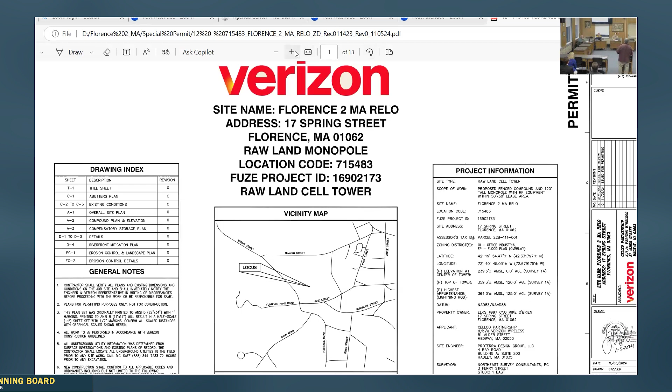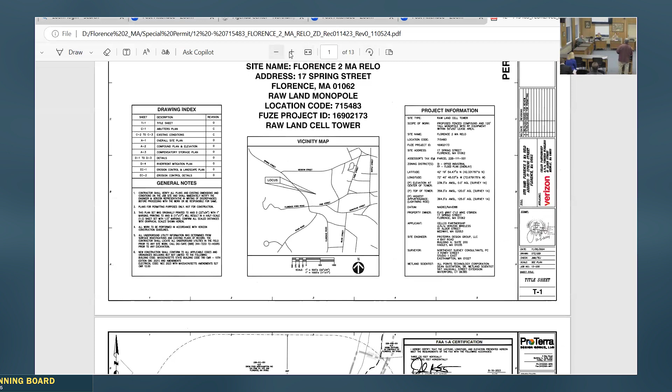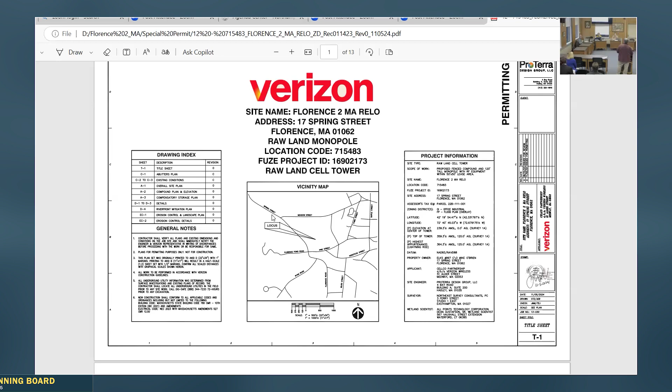Hi, my name is Jesse Marino. I'm with Proterra Design Group, civil engineer on the project. As was stated by Ellen, this site is a replacement for the smokestack site located adjacent. It's located on a property here about 3 acres in size. It's the current home of the Elks Club.

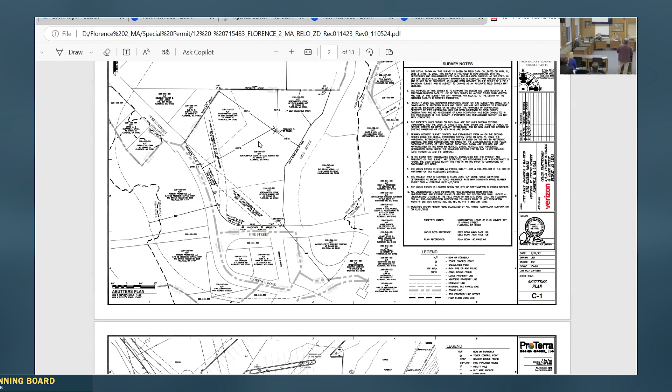So this is the existing property. The adjacent river is on this side to the east. We've got a co-op farm to the north, and two streets located - Spring Street is located to the west. Here's the existing site. There's an existing building for the Elks, there's parking in the front, and we're utilizing an area to the right of the building in this location to propose the facility.

So if we zoom into the site, again, adjacent here is that existing building. We're proposing adjacent to the building to install an area that consists of a monopole with elevated platforms. The reason for this is it's located in the floodplain, so we need to elevate those things above.

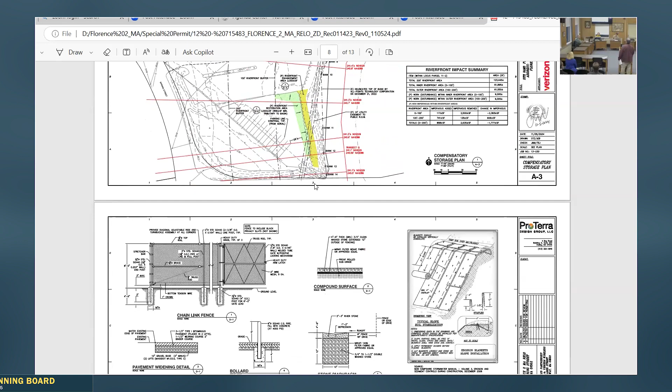Around the site, for security purposes, we're proposing a chain link fence with slats. The reason for that is the slats give us a bit of an opaque look, so you can't see through, but it also allows the water to come in and out in the event there was a 100-year flood event, so it doesn't impact any of the floodplain heights.

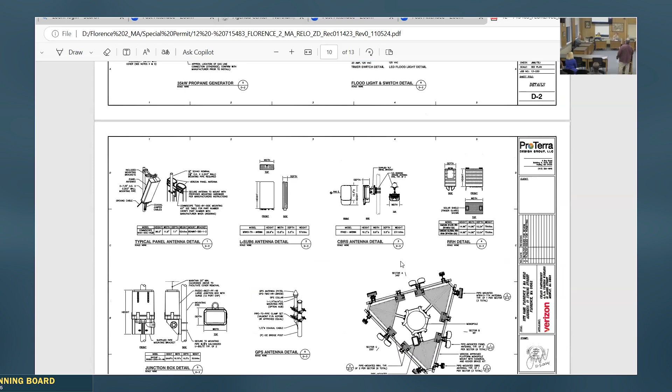The equipment itself is very similar to what's on the stack now, except that it's the latest generation of equipment. In order to have this upgrade using the latest and greatest equipment, the stack was not able to support that any longer.

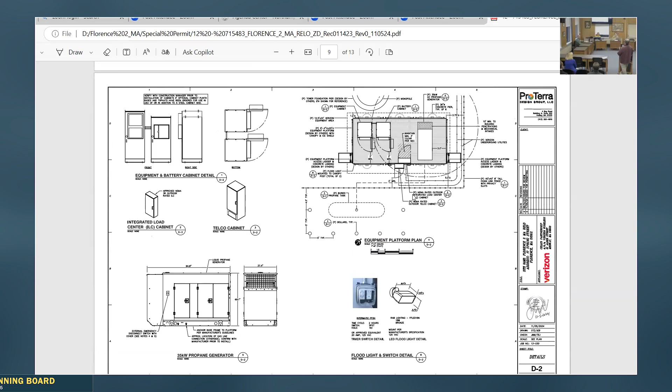So this new site will allow that to move forward. It does have a generator, just basically a small backup generator, fed by propane, so there isn't fuel storage there as far as diesel or anything like that. The idea is that if there was a power outage for an extended period of time, this can be used to charge the batteries and keep the equipment running.

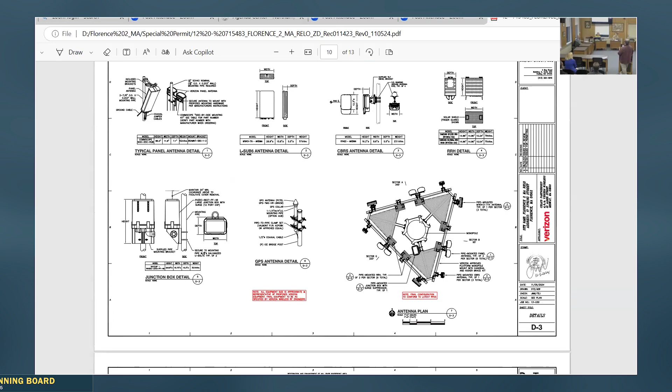At the level of the antennas, it's basically a typical platform, as we'd call it in the industry, and this allows the different antennas to be installed on it at the height required by the radio frequency folks, so that we get similar or better coverage than what's on the site now.

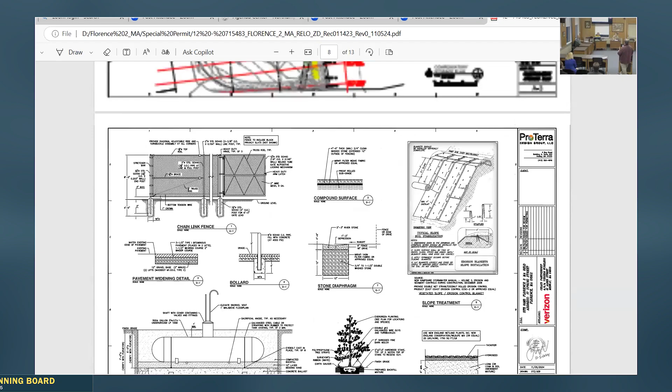We did a stormwater analysis, and there was also some grading proposed in this area. You can see here behind the building and to the side, and that is for compensatory storage for the very small amount of fill that we would have in the floodplain. It's a pretty small amount, I believe it's under 400 cubic feet, which is 15 cubic yards. But nonetheless, we provided comp storage for that.

And this also allowed us to expand the existing stormwater system a little bit to account for the development in this region here. That's the project basically in a nutshell, and I can certainly answer any questions that folks would have on the site.

I guess, yeah, if you want to just talk about coverage a little bit. I will just mention that the rear setback is 115 feet and the requirement is 120, so 5 feet shy. However, based on chapter 350, section 10.9 C5B, the planning board can allow a shorter setback if the tower is designed to collapse on itself, and we will be constructing a tower with that capability.

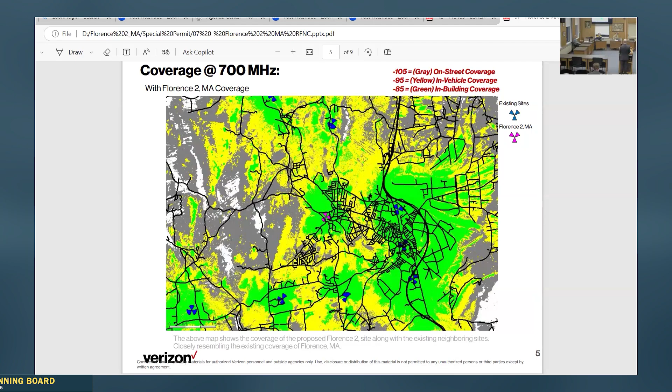Going to the next slide, you'll see what the facility looks like when we move off the Brushworks facility and build our new facility at the Elks. The two don't run at the same time. Once the new facility is up and operational, within hours or less, the radios on the Brushworks facility will be locked, and the process will begin of decommissioning our equipment on that Brushworks facility, which takes a little time to work through the necessary permits, but that work will be done.

Again, just as part of the record, we wanted to share all the surrounding facilities that we already have within Northampton, within Florence, and within the surrounding community. Verizon's very proud of the investment we've made within the city of Northampton. I myself have been with the company almost 15 years and have had a hand in modernizing or building all of these facilities, which is great as a Western Mass guy. I remember coming up here as a kid—my father worked at the courthouse, and then when I went to UMass I was up here a lot. So it's important to make these investments in our community.

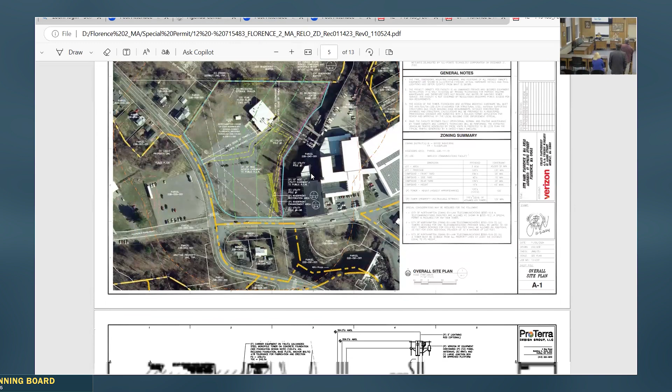So the crux of the change had to do with the riverfront area. From the edge of the flagged resource along the Mill River there are two regulatory thresholds that go out. One is called a 100-foot inner riparian, and then there's a 200-foot outer. One of the requests by the commission — I'll show you here if you can see my cursor — this is the 100-foot inner riparian line. See this dashed line right here? And as you can see, originally the corner of this compound extended into that region.

So one of the things they asked us to do was reshape the same area that's here, 2,500 square feet. The new area basically pulls this corner in this location right here outside of it by extending the area in this region here. So basically what we've done is made this area basically the same size, but totally 100 feet outside of that stream. In doing so, the tower slid a few feet this way. So that's basically the change.

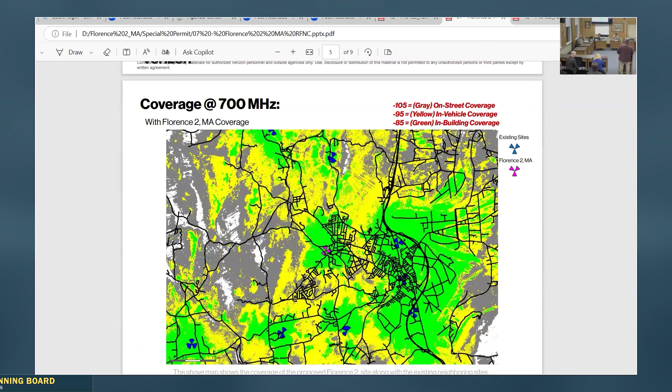Let me find that just so I can... let's see here. It's D1.

So originally, we're not seeing that. You are screen sharing. Let's see if you shared that. Share the wrong one. Right. Yeah, let's see here. So let's hit OK here. And then let's go stop share. And then let's go share. And then I'll just hit screen. Yeah, so or you can just share that if that's what you want. That's fine. Yeah, when I did this before, that's what it did. So maybe there's a different way to do it. Well, I'm thinking if you just do entire screen, then whatever's on your... there it goes. Yep, okay, perfect. Okay, so correct.

Originally it was proposed here, and this was some of the area that was in that region that was discussed by Dean. So as part of that, when we put the compound, when we changed the shape to keep it outside, we no longer had the ability to put it there. So we slid it in this location here. Right now there's a dumpster there with a fence, and we slid it sort of behind there.

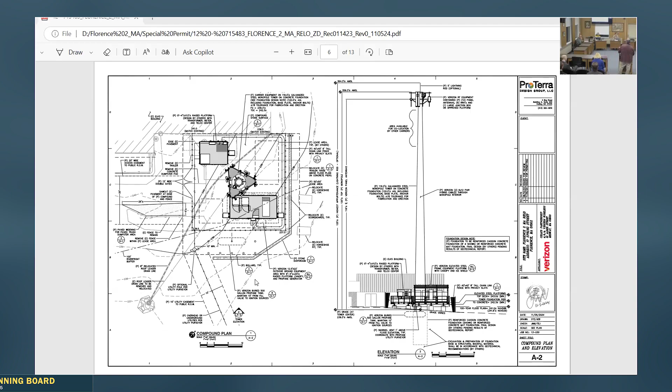The last little thing I saw on the plan is up on the north side by the farm there. There's this note about a slatted fence to protect the storage container.

Yeah, good point. Okay, so right now, and I believe there's somebody here from, so in the area that we're proposing right now, the folks at the Elks have a storage area, it's like a container that they store things in. And we provided an area outside the floodplain in order to put that, and we have some screening in front of that. I don't know if the plan is to move it there, but we had accommodated that if they needed to keep the exterior storage that they had there.

Okay. Is that accurate? If we get rid of the storage - excuse me, Louis Hasbrook, 33 Laurel Park, Northampton, Mass., a member of the Elks Club, here to represent the club for this hearing. The storage containers are removed, and we don't have a current plan to replace them. And if we were to, we would start again.

It seems like they were removed a year ago, and so it seems like we're doing fine without them. And less is always more.

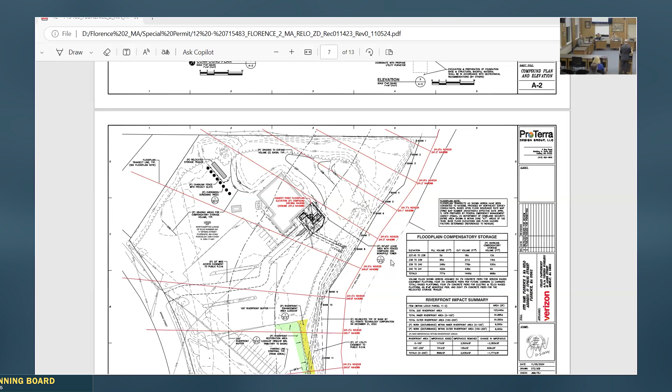Hello, my name is Barbara Ferranti. I live on Meadow Street. I've listened carefully, and I am just thinking of a couple things.

Generally, I don't have an objection. I just noticed that for 20 years we've had something very similar. I don't understand why all of a sudden we're raising significant concerns about our health and so forth. That's fine, everybody's entitled to their opinion.

But I just want to point out that it isn't entirely a residential area. Across the street is Chartpak, which is all commercial. Behind the Elks is a factory area. There's residential on a couple sides, and I can see that a person would say, I don't want to be looking up in the air at the pole all the time. But just in general, I'm not objecting. That's it, thank you.

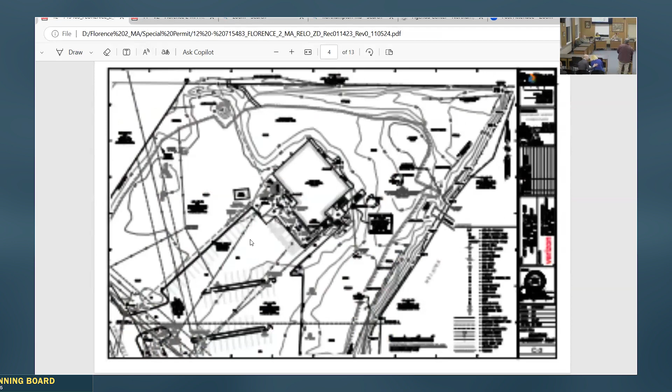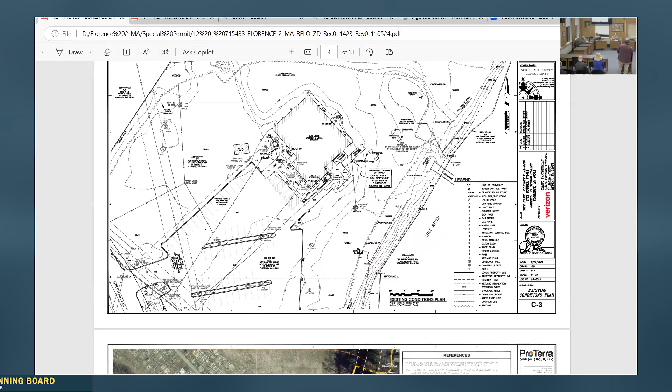I think let me show you. I think the trees you're talking about are here. There's a couple trees right here, and the existing power lines are along here. Okay. And we'd go straight across this here. The only thing in this area is a sediment trap, part of the stormwater system, and to the rear is the detention basin. So I don't think there are any trees between these two locations. I believe you're talking about the trees along this area and along the bank here.

The idea is, no, not along the bank. It's closer to the paved parking lot. Yeah, no, those are here. Okay, these are on the existing condition. This is the existing condition plan. Those are shown here. And we're actually going to be in this location across. We have to get from this existing line that's here, either from this pole or this pole, to where the tower is here.

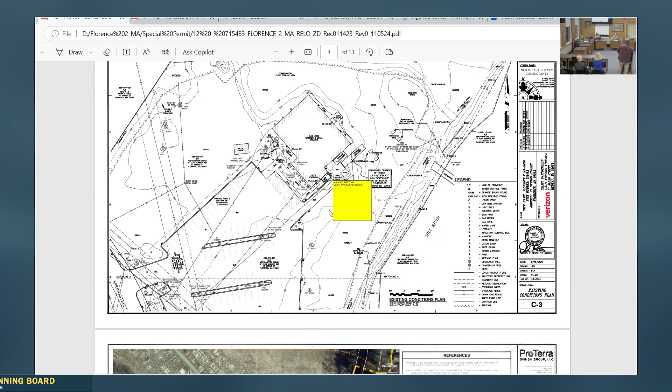So if you see here, there are no tree species in that area that would be affected. You can also see that on the aerial as well. I believe the trees you're looking at are in here, and we would be going in this location between the sediment trap and the detention basin. All right, utilities, great.

Thank you. Councilor Maori, you had a follow-up question. This was to clarify about the smokestack. Is there any plan to take it down? Because you're going to have the tower and then the smokestack that's becoming more and more dilapidated. Are there any plans to either take it down or restore it enough so it's not a hazard and an eyesore, so you don't have both things going on in the sight line?

To the best of my understanding, the smokestack is part of the arts and industry building, and any maintenance or plans to make adjustments to that structure would happen with that ownership. The only obligation of Verizon would be to remove their existing equipment that's on the outside of the smokestack.

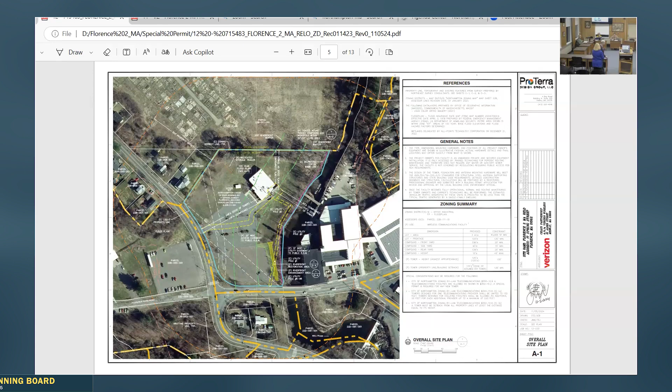Carolyn, we need to vote to continue — need to open it officially and continue. Okay, so I will next open our 7:30 hearing for a site plan for a major project by R. Levesque Associates for two buildings of approximately 20,000 square feet, mixed-use condominiums and site development at 76 Maple Street, Florence, map ID 17C-233 and 327. The applicant has requested a continuation to May 8th in order to have time to respond to comments from the DPW.

Carolyn, the May 8th hearing, do we have anything else scheduled? We just have one, we don't have it scheduled yet — the legal notice will go out next week. So we just have one other hearing, a smaller project. I would probably recommend putting this at 7:30, and then we can put the smaller one at 7. But this was a small one. Yeah, I remembered the last telecommunications tower, which was near JFK.